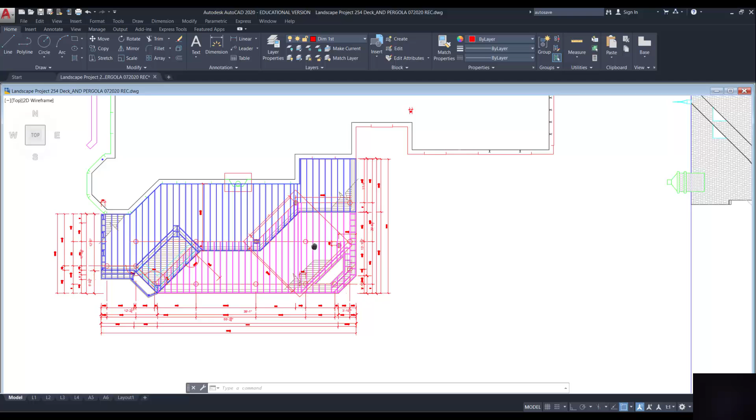So what I'm going to do is take this area and copy it over to another part of the drawing and then revise it so it becomes a simpler angle to work with. I've done that here, taking basically the 4 posts and the beams. The deck beams, some of them line up nicely, others don't, and this is simply to show you other lessons that are coming very shortly.

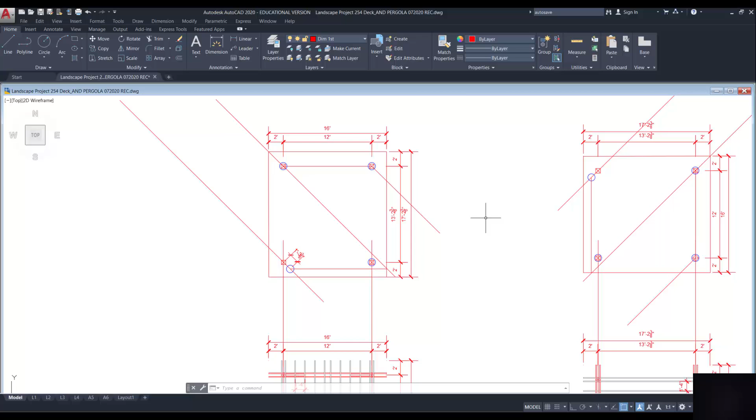I've done it in 2 directions, one angled 45 degrees clockwise and the other counterclockwise. The reason I needed to do that is because you only have beams running in one direction and posts or ceiling joists running in the other. In this particular case, the beams or lintels are running east and west, and the joists are running up and down, and then I dimension it accordingly.

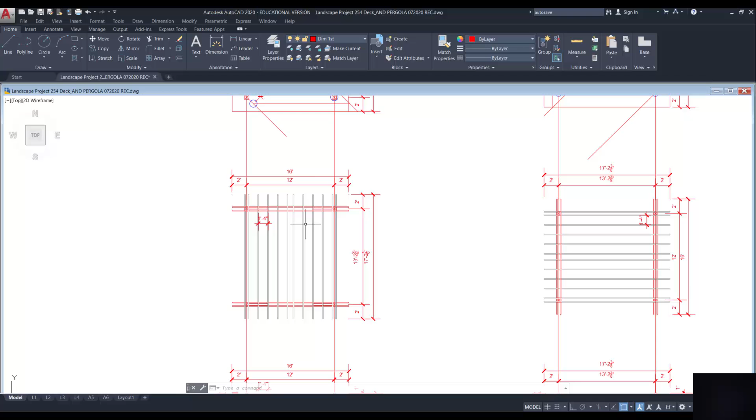It's very critical that when you make your sketch designs you understand exactly how you're going to put the project together. And when we go to the tables and charts for this, we also have to understand how we're supporting this. So here I have my brace, and this is something I was talking about a bit earlier, why are braces important.

Well, if they're actually structural braces, then they can diminish the size of the span of the beam, which means you can have a smaller size lintel member. I'm using beam and lintel interactively, or interchangeably, and I apologize for that, but they're quite often used in the same terminology, especially in all the books or research you'll be doing. The lintel is 2-ply, the beam is 3 to 5.

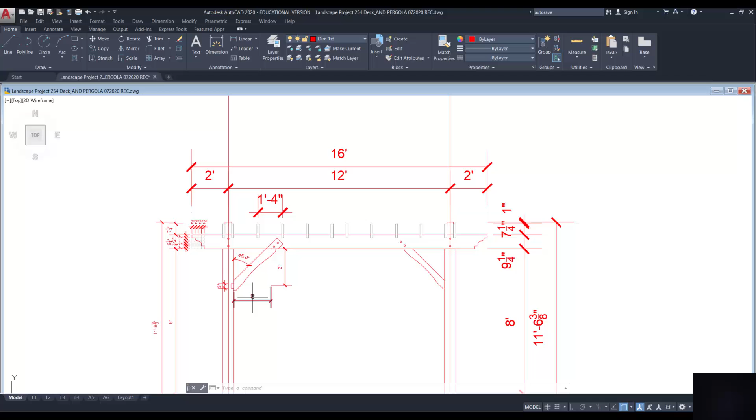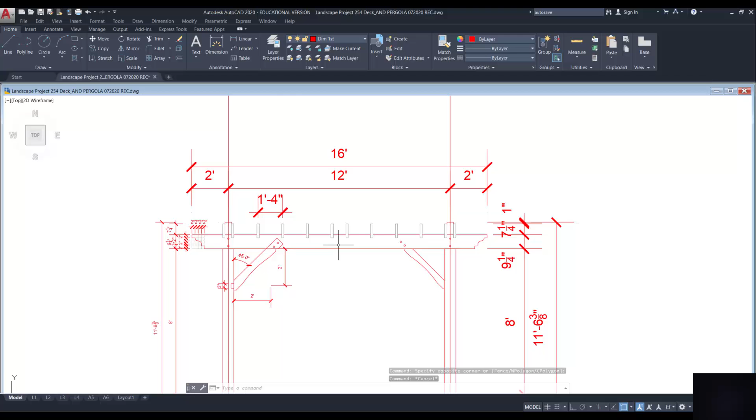This structural brace, if it truly is structural, will actually remove the distance of the brace from the overall span. So without the brace, I have to take a look at the charts and select a 12-foot span. With the brace, I can reduce that by 2 feet on either side, so it would only be an 8-foot span, and you can see how that would substantially reduce the size of the beam based on what we did earlier in beam calculations. So I have that shown.

I will be drawing formally the actual brace with detailed information. I'm going to show how this end cut actually looks with dimensions. You see dimensions here are all sorts of different sizes, but that's okay, that's because of the viewport. And then I'm going to be showing, and this is going to be a lesson all on its own...

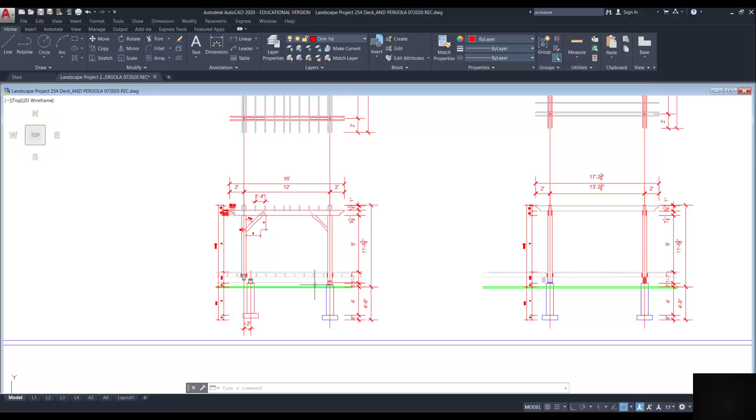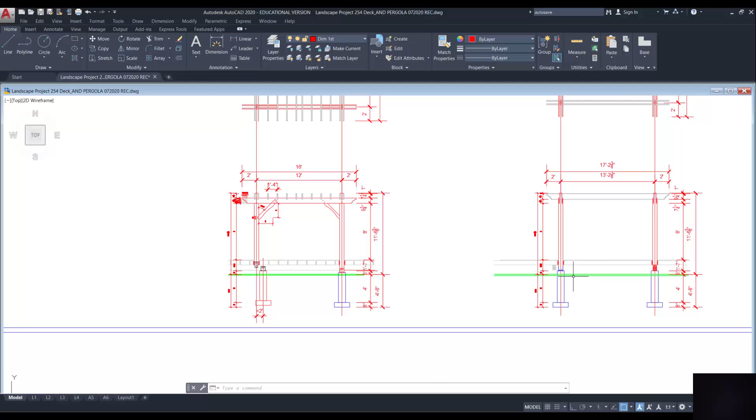...the different support mechanisms. Sometimes we'll have a pergola post on an independent column. Sometimes we'll have it on an existing beam, and if it's within a certain distance of a support for that beam, we can place it right on top of the beam. Sometimes it's actually part of the beam structure itself, so it sits on top of the beam on top of the post.

So this is a deck beam that we can put a post right on top of. I'm going to talk about all the different scenarios. I've drawn them on purpose to have all 3 — you may only have 1 or 2 cases. So my final set of drawings will look like this.

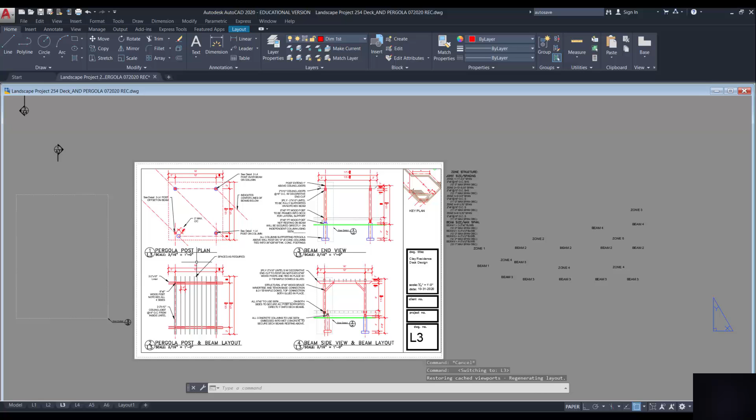There is my top view, which reflects basically the same as on the framing plan, where the 4 posts are. That's all I need to know on the framing plan. And then I identify the overhang of the lintel and the ceiling joists. I'll then identify the plan view of that, where the actual structural posts reside, and what the distances are.

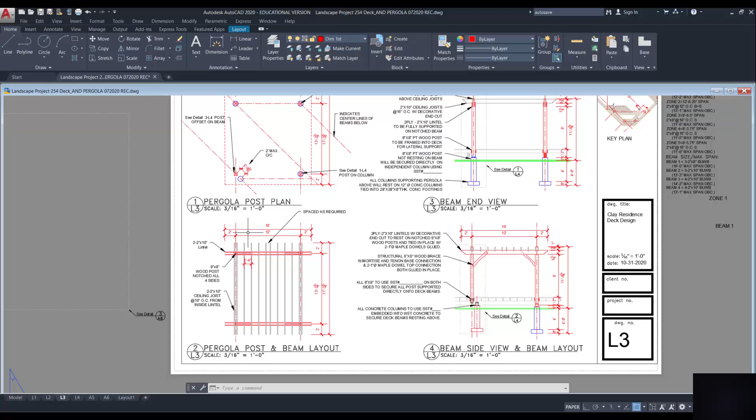I'll show the 2 different elevations because there are 2. One has the structural components as part of the post, and you can see how I've notched this out for my particular project, and the other has the structural components from the side and the dowels and how they're attached, as well as the brace. Notice I don't have a brace in the non-structural direction, but I do have one in the structural direction, to show the differences between the 2 methods.

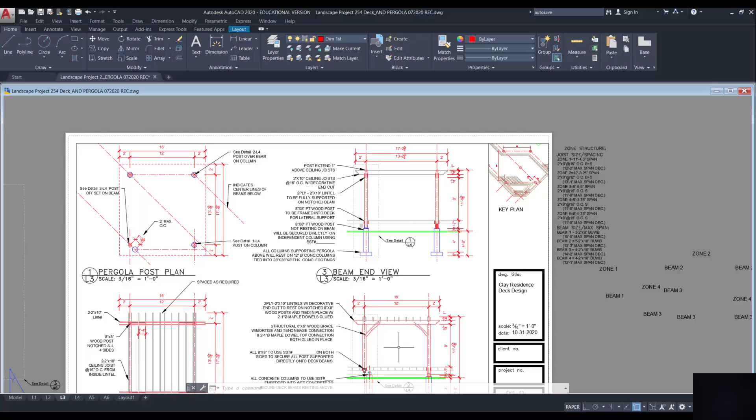I show all the different base configurations, and then I also have a detail page which pulls all of this together. This is a detailed section, and this is all available to you. I'll be posting this online so you can see the notes that I would put in, how I draw it. I didn't include the Simpson Strong-Tie actual numbers.

You will, only because I didn't want you copying me. I mean, it's a bit of research you have to do. And then how we'll actually do calculation on the footing that's required for a pergola, as well as my offset post. This is the most...

Difficult — I shouldn't say that. It's just a different detail from a common detail. And then my end cut detail, my brace detail, I have that all in plan.

This is where you're going to be leading with your final portion of this part of the project, and that will be due in week 11. So next week, week 9, your sketch design by the end of the class. And then you can start working, and that's what we need to do, start working toward these drawings. We'll have approximately 3 weeks — 2 weeks to the elevations, and the third week will be all the little details you have to apply to it.

And then we only have 2 weeks left in the program, which finalizes this project. So we do have sort of the end in sight. We're in the second half of this term, and so we must keep this pace going throughout the rest of the program. So that's all I have for you for now.

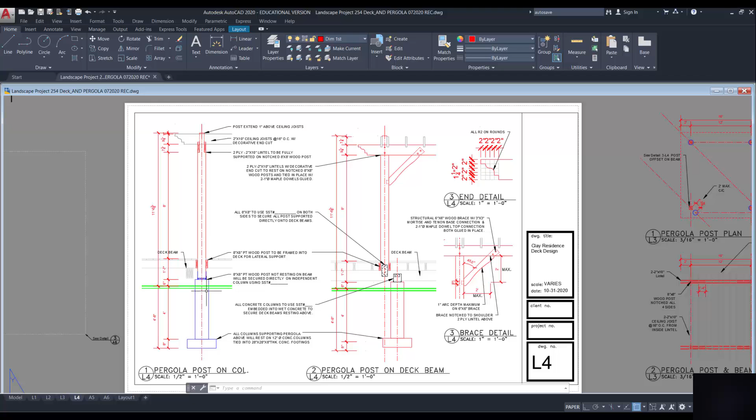Next week, be ready with your sketches, because we're going to be transferring those sketches. The lesson will be to transfer the sketch into a CAD project.